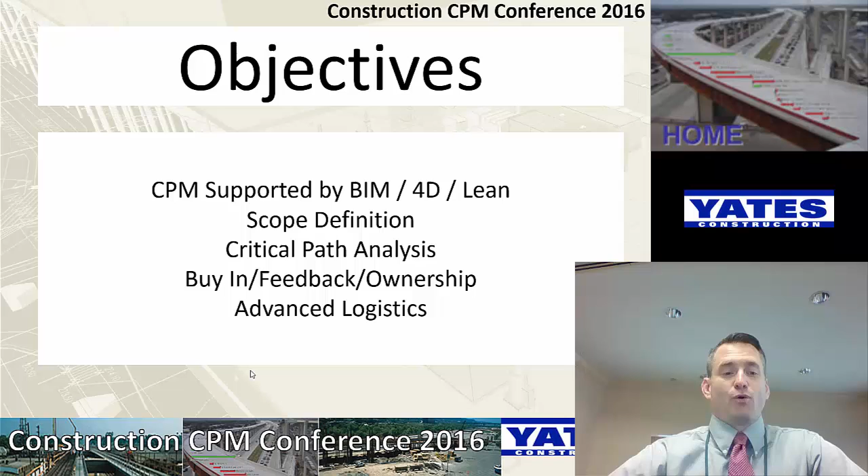I realize that for many of you in the room, this isn't your first rodeo. I'll ask the question again: how many of you have created a CPM schedule? The vast majority, that's what I expected at a conference. Now, how many of you created a 4D schedule? Over half, that's a lot better than we've gotten in the past. That's great, so we're coming along, we're doing a lot more of it.

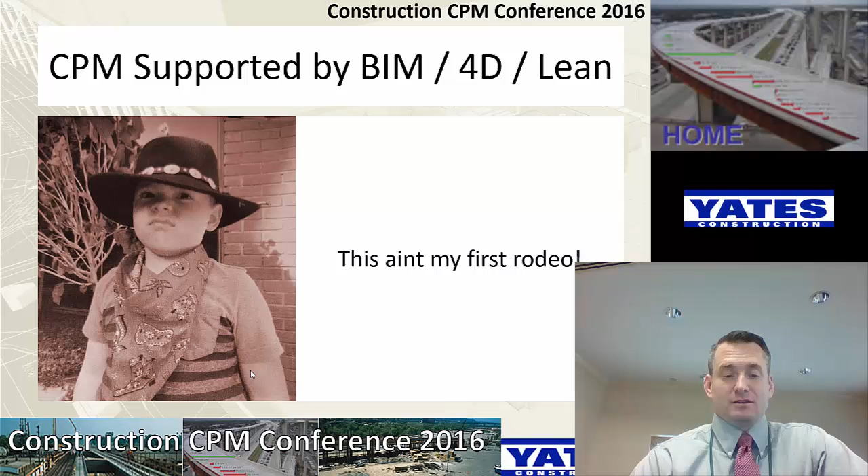So because this isn't your first rodeo, and it's not mine either, that doesn't mean we still can't learn something. In fact, we have to learn something.

Tom showed this yesterday, the same idea of the graph, that the design and construction industry is less productive than we were 50 years ago. He went through it yesterday, the top bar is the rest of industry, and the bottom bars are all different takes on construction, design and construction. Personally, I find that embarrassing. I love to build, right? This is my industry, this is my life, and we're less productive than we were 50 years ago. So I really want to change that, and I really want to be able to do it better. I think that BIM, Lean, continuous improvement is our only opportunity.

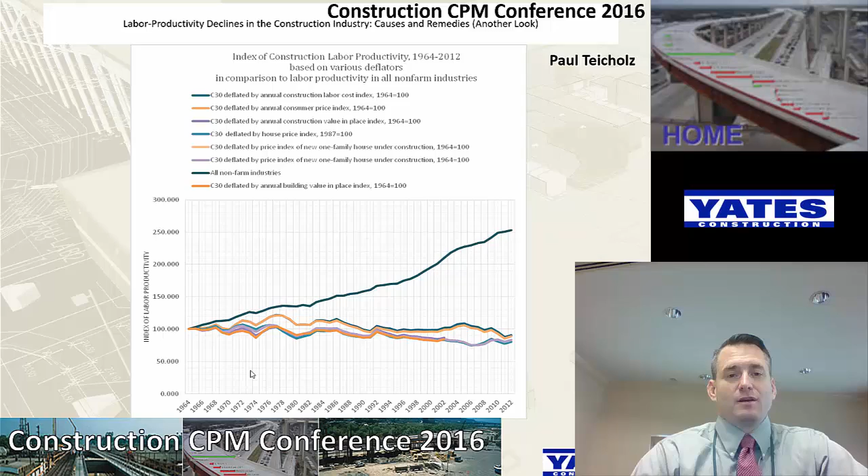So skeptics are welcome, right? I want your participation, I've already made you raise your hands a couple times, I've already had you participate. We already had some great participation from Charles up front here, as I got started a little earlier than I should have. But as we go through, I want to be able to talk about these things and have conversations about how we've used them and how we've done them.

So, any questions so far? All right.

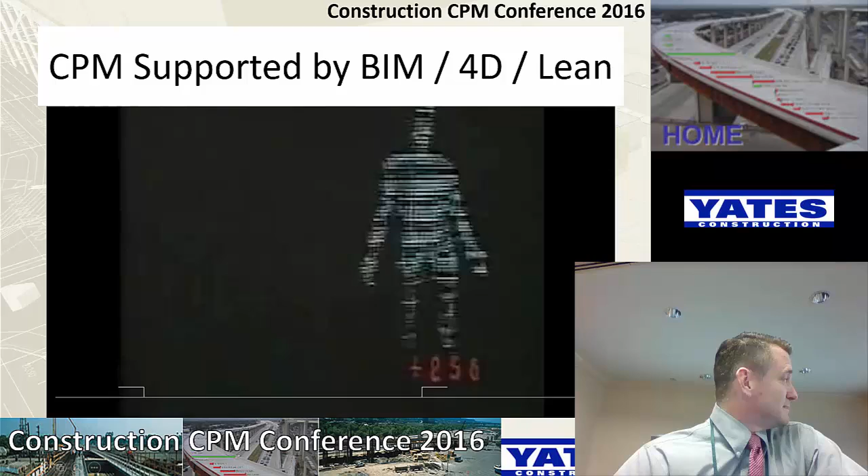Many of you will be familiar with the good old TV show, The Six Million Dollar Man. I used to love it. Steve Austin was a good guy, right? He was an astronaut, he was a hero already, wasn't he? And then the difference was he had an accident, but when he had the accident, he ended up being better than he was before. Better, stronger, faster.

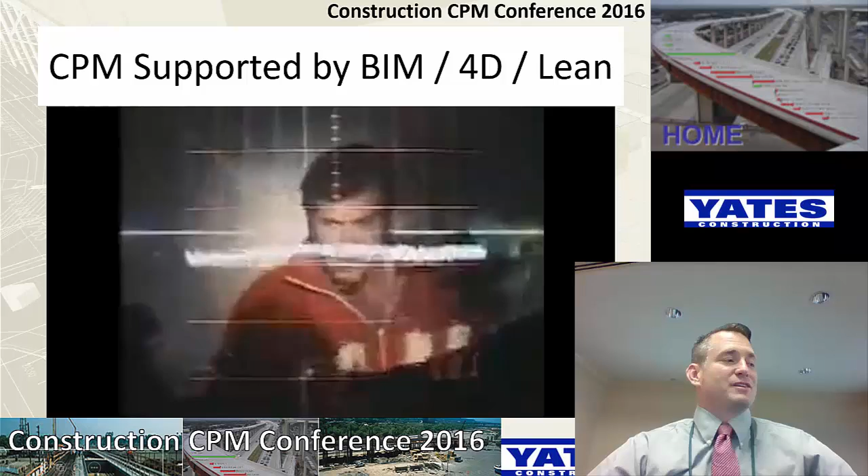That's exactly what I want to do with our CPM schedules. It's the same CPM schedule, it's the same processes that we've been going through for many, many years. We just need to make them better, faster, stronger. We just enhance them, we add technology to them to make them better.

So the first scenario I want to run through is when we're doing scope definition. This is one of the major principles of building a schedule, defining what scope we're building it for. So in this presentation, there's lots of light in here, if it was darker it'd be easier to see. But the idea is we have two sheets, plan sheets. Now this project was a 300,000 square foot, $60 million project. It had a big, good set of plans. It was just core and shell, which makes it a little bit easier.

But I want some thoughts from the room. A $60 million project, how much time would one of you spend flipping through drawings and sheets to understand the scope of this project so that you could build your schedule? Thought? A week and a half, okay. Others?

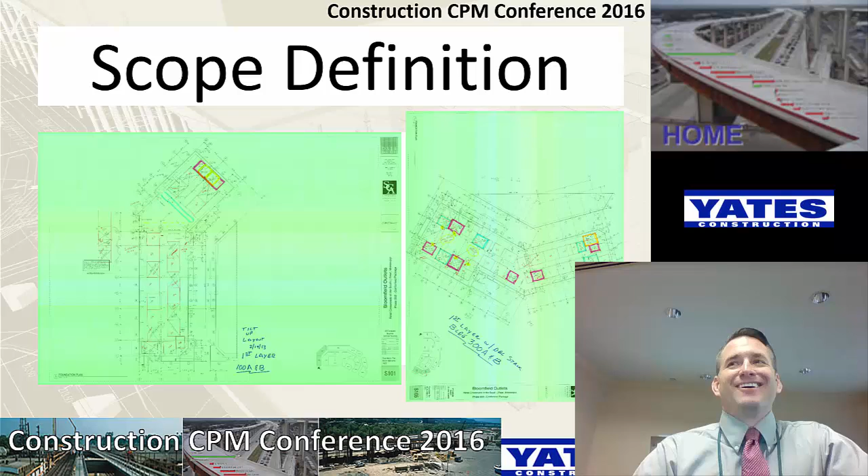Now, have other people in this room experienced the same thing, or have they experienced it differently? Anybody experienced the same thing? Hands? Okay, so we got a few. Anyone experienced it differently, that it was more work? None. Yes.

Yeah, so the point he made, so it's recorded for others, is that the more involvement people have up front in the BIM process, the more understanding they have of the scope. And so instead of walking up to somebody and dropping a set of plans on their desk and saying, get familiar with the project, you've been eating it in little chunks. And then you're very familiar with it when the time comes to actually produce the schedule. Mm-hmm.

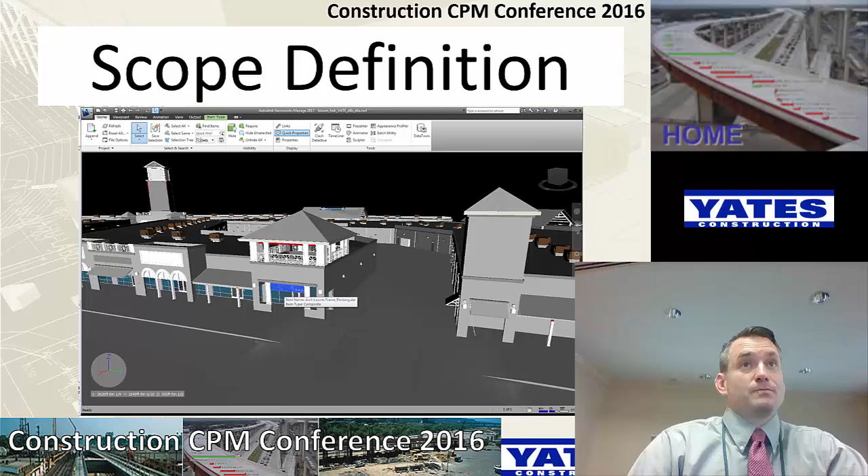And like Chris pointed out, if you're involved in the process, it goes better. That holds true for the architects and engineers as well. If they're actually building in the model to produce their documents, they produce better documents, and actually for a lower cost. So, all right, if I take this one step further, what I'm working with multiple schedulers to get us better at, we do it some of the time but not all the time, I want us actually building the schedule with the model.

Not building them separate from each other, but actually tying them together. And not actually creating the activities with the model as a background. I think it makes us faster at building the schedule, and we get a better schedule when we're done. Not as apt to have scope gaps and miss parts of scope. And it makes it that much easier to understand.

So it sounds like there's agreement from the group back and forth that in scope definition, we feel like it's better if we go with CPM and schedule to create a 4D model and produce it that way. So next, any thoughts or questions on scope definition? Yes.

Mm-hmm. Yes. It changes over time. And so if you only have a very low level model, if it's an LOD 100 or an LOD 200, then you would probably be using a level 1 or 2 schedule. And it turns out that the AACEI level of detail for schedules aligns very nicely with the BIM Forum LOD specification, level of development for models. Yes.

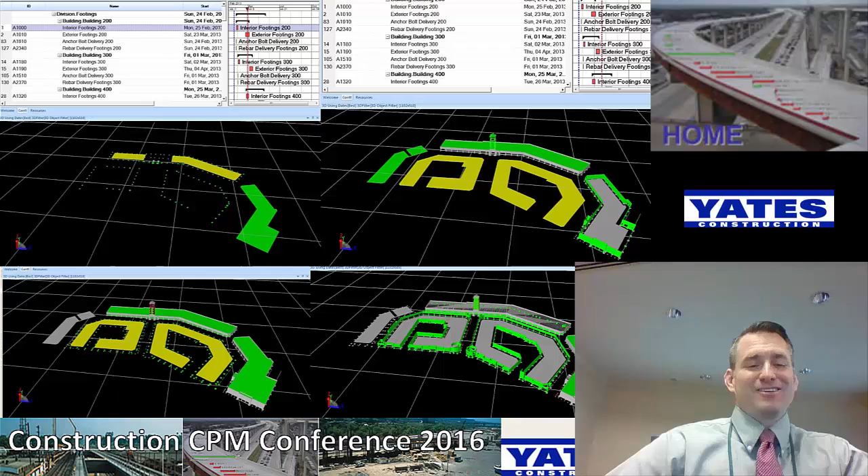Okay, critical path analysis is the next area. So previously, if we're analyzing critical path, we're going to publish a schedule somewhat like this, right? And of course, how many pages was this? Oh, it's probably 68, 70 pages. Here's the critical path itself. I think it was only down to 9 pages. This is what we would do, and we'd send the critical path out and tell the superintendent, the project manager, hey, go through this, look through the CPM, and tell me what you think of it.

Okay. Here I actually have the PDF version. There it is. The unfiltered one, the whole schedule, was 44 pages. And then the filtered one, just CPM, was clear down to 8 pages. But we're used to seeing these documents and produce them all the time. Once again, let's say we're in a claims situation, or we're not in claims but we have a project that's behind schedule and they want some help. And so they're calling in one of us as a schedule expert to figure out, okay, how do we cut some time out of this schedule?

If they set down a 44-page CPM schedule in front of you, 44 pages, 8.5 by 11, this is about a $50 million project, even if they give you the XER file, how much time are you going to spend understanding that schedule? Thoughts? Oh, if you haven't seen the prints, a whole lot. So if you sit down with the prints and the schedule, you're a couple days probably, right?

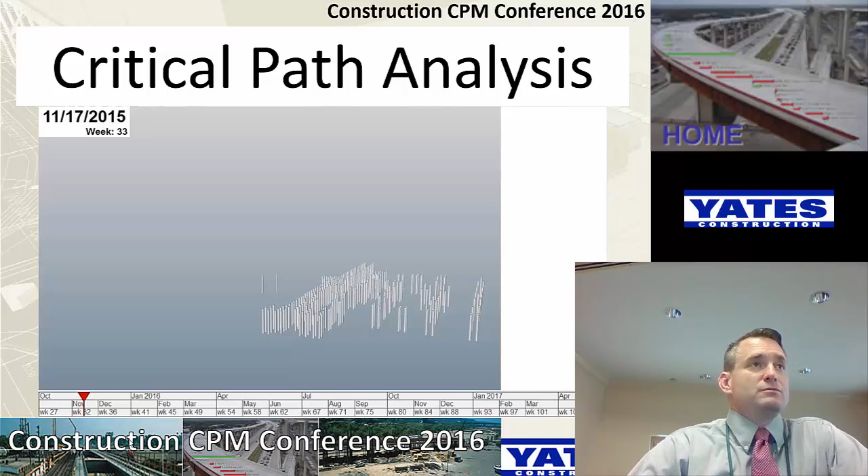I probably should have made this one a little bit faster. But I've gone in with a filter. Yeah, and it took me like a couple hours to figure this out the first time, like 5 or 6 hours. But now that it's figured out, it's pretty easy to take a standard CPM schedule, just apply the filters, and produce a quick video of it.

Now, the one that hits me on this project that I don't understand is why none of the piles were critical, right? Well, I would have really thought that the piles underneath those footings would have been critical. And so there's something there that's not quite clicking for me, and I've got to go figure out what that is. It could have been submittal approval. Yes, it could have been.

There's all sorts of things it could have been, but really, a lot of those things I would hope we could have alleviated. I would like my critical path to actually be physical items. I don't like it when my critical path is jumping around or going crazy.

Now, one thing that's interesting, if you notice that steel came up red, it was critical, and then it turned white. The detailing activity behind it is not a critical activity. And so it overwrites it and it turns it back to white with everything else. And so you don't see all the critical items when you're done, but you see the flow through the project.

So the general flow is, of course, starting with on the right side, working our way to the center, and then over to the left. All of the slab and foundation work on the left side had float time to it, and then our steel came up. Any other thoughts or questions? This is a perfect opportunity. Yes.

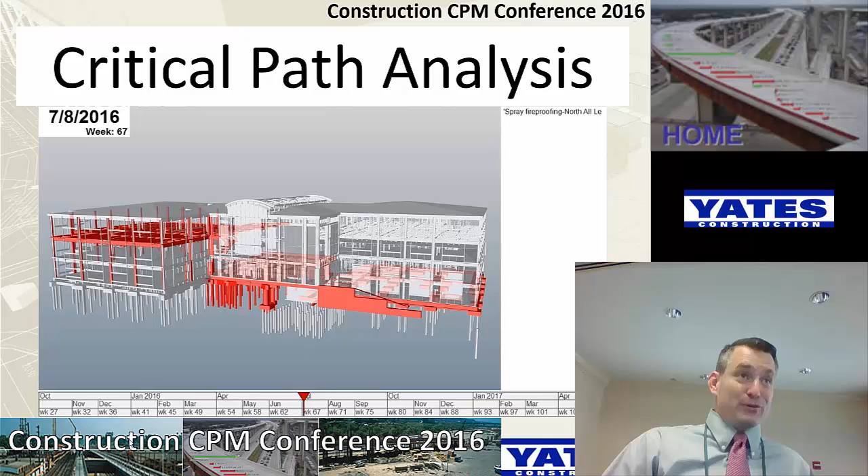I only did longest path. I could do near critical. I just did longest path because I know that superintendent, and if I show him anything red that's beyond critical path, he will expedite it too, and he'll put overtime in. So we'll just let him work with the critical path first, and then once he is really good at making the entire project early on everything critical.

Because everything that's out there, he'll put overtime in and he'll bring it in because he wants to build time on his schedule ahead of time so that he has it to use when something goes wrong. He's really good. Yes, sir.

Okay, so we produce every 6 weeks or every 4 weeks, every time we get a schedule update. Then, like I said, this particular project is working off of models of others because they haven't started, I think they're just in piles now. And so we are ahead of time. And so every month when they do the schedule update, we'll produce 6-week look-aheads.

And the idea is 6-week look-aheads with a regular view like you just saw, and then a 6-week look-ahead with a critical path. And then, of course, a complete update of the entire schedule. And we produce the original, the schedule file itself, the SP file. And everybody has free access to the open viewer.

And so everybody, even the tile guy that just has a little teeny contract on this project, can download the free viewer and be in the schedule and actually filter it for his activities. And then we produce videos for the people, a foreman in the field or somebody that just wants to look at it on their phone real quick. Did that answer your question? Okay.

My goodness, I just cannot go through slides fast enough this morning. Yes, that is how we tie all this together. And so I'll have pictures of that. If you have a particular question now, I'll hit it, but otherwise I'll roll till I see the slides.

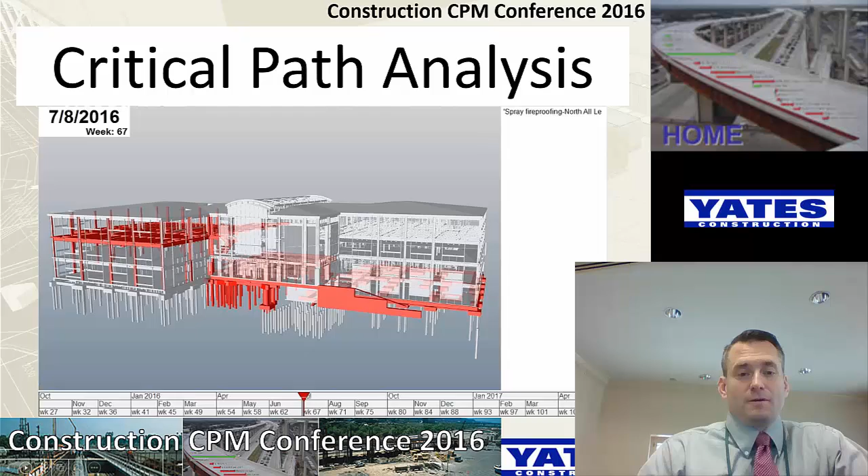All right. So buy-in, feedback, ownership. You guys have led me right into this, right? We're talking about the superintendents using it. How does it work? Basically what we have here is a schedule update, right? The blank fields, actual start, actual finish, remaining duration that we do for a monthly update. We still publish this, even with the 4D. We still need that feedback and information.

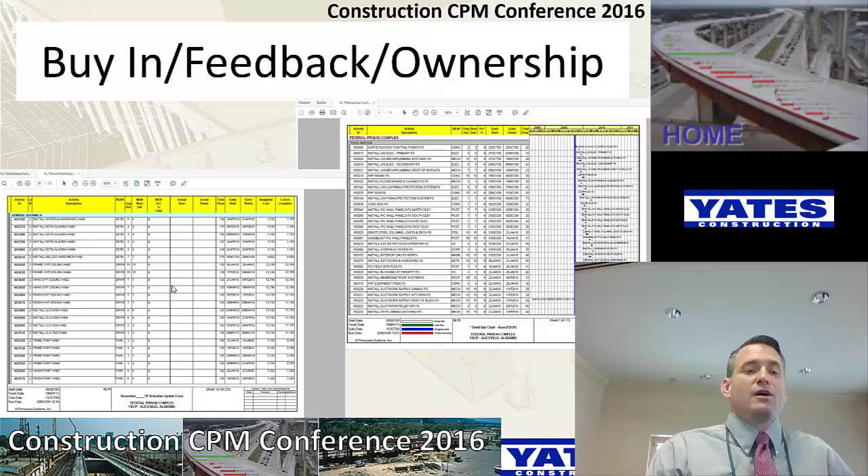But what I find is people are actually starting to carry it more. They're actually using it because they feel like the schedule is relevant. I'm not losing those superintendent foremen that used to think that schedule is just a piece of paper. They're actually getting into it. And we talked earlier about being involved in the process. This particular one is a project. This was a proposal. This is a level 2 schedule like you guys were talking about.

You're going to see lots of long bars, lots of large areas on this earthwork project. But the idea was when we came back and we did this, they could actually see the flow of it taking place as the different scopes of work kind of go around and fill in and redo this entire retention area. And what we do is we have a process. It's a very lean process.

We meet daily. We're preparing for the proposal. We're going through it. We meet daily. We walk through the schedule every day. And they look at it and say, no, change this, no, change that. Sometimes that meeting has been 5 minutes. We all get on and there's nothing really to look at today, and then we all get off. And sometimes that meeting is 2 hours with an additional hour later that afternoon with one of the 4D champions that sets his own meeting that afternoon to call people in to say, hey, we need more review on this.

And we build it as we go. And then people are reviewing it and it comes along. That is lean, right? That is small steps, not trying to bundle the work. We have that tendency, all people do that. We want to do all this at once and then turn it out there, and then we go back and change all of it again. But if we make it in small steps, here's this little bit and then change it, here's this little bit and change it, wow, we get the buy-in and everybody does a lot better.

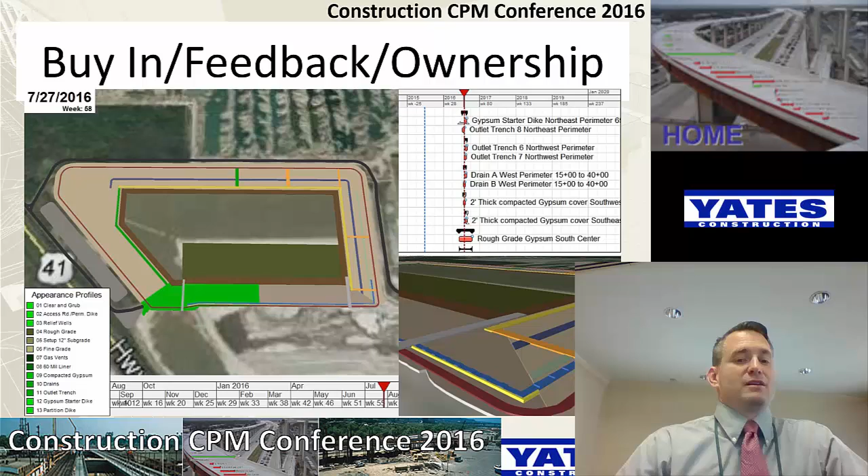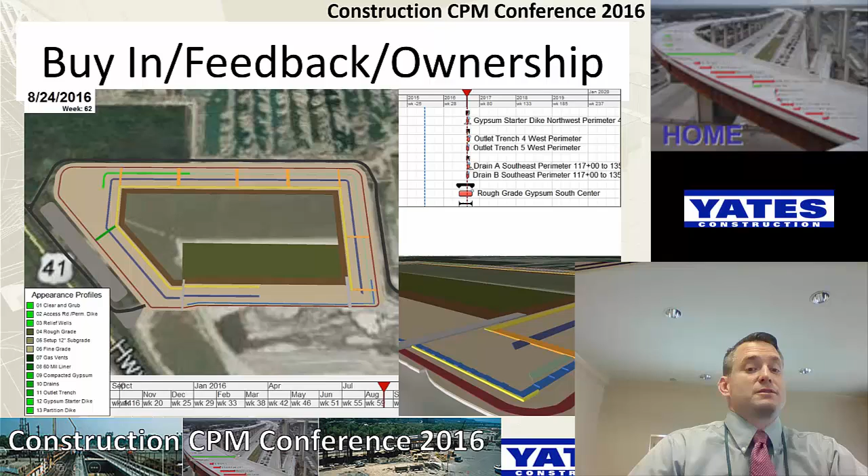Thoughts or questions on that aspect of it? This was pre-award. This is pre-project. Okay? All right, here we go. This is award or project, feedback, buy-in. These are my Post-its on the wall, right? This was building the original feedback on the schedule, right? Doing our last planner system. How many of you have participated in a last planner pull session? There, a good number of people.

Okay, so the big advantage I see in the last planner pull scenario is that it gets the people that are doing the work, foreman level, superintendent level, involved in the schedule. They actually are looking at it and they are writing their own notes. I keep seeing software out there to take all this onto the tablet and all this stuff. There's a huge advantage to them writing their own notes.

Now, when the software is available and each guy can use his own tablet and type in his own thing and arrange it, then I might go there. But I need each individual. I don't want somebody else doing this for them. I want their buy-in and their feedback. And then, of course, we roll this back into the schedule. And so here's our 6-week look ahead. Those are the Post-it notes from that project. Here's a recent 6-week look ahead from that project.

Now, you'll notice those other 4D models I showed, you guys got a quick understanding really of the flow of the work and things like that because they were all a higher level. They were a level 3 schedule, sort of level 3 model. This is level 400. This is fabrication models coming back in. That ductwork is what the ductwork guy is going to send to his bending machine and CNC machine to actually cut with. Right? That's what he's going to use. And so this is really detailed.

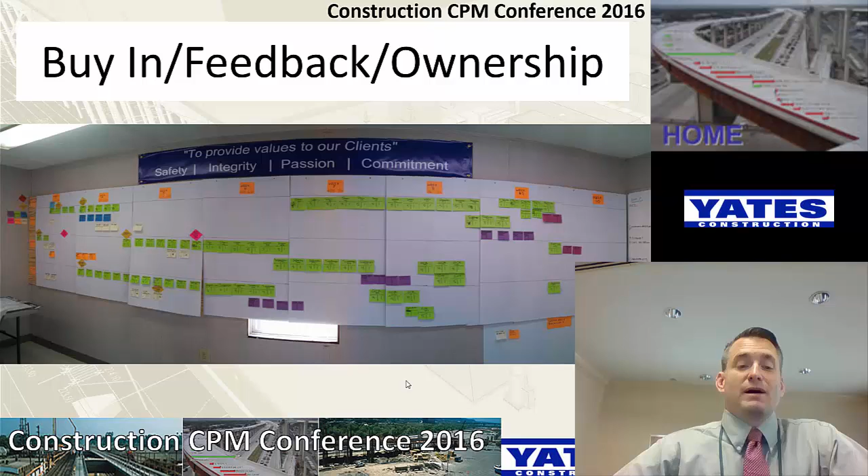And he drove to his other office and he sat down with the people and he had it, instead of it going through the Army Corps of Engineers, right? Usually with the Army Corps of Engineers, that's a very rigid process and you don't deviate from it. He went and hand walked it through to get his project an extra 3 weeks up front. So yes, we start to see those changes. And we didn't have to ask for it. He just saw it happening. And when we combine all of this, they start to build off each other.

All right. Yes, sir.

We didn't ask. This was early on, we hadn't even really developed a relationship. It was just a matter of we looked like we were putting forth every effort to do the best that we could, and he saw a way to be a part of our team and help. He stepped up and said, I want to help, basically. And now that moment established a relationship that is working very well, and we really have a team dynamic.

Now it could have been completely different. If that had been a different owner in the room and he was kind of like, yeah, you guys are messed up, the whole project would have been going a different direction. But we don't like those projects anyways.

It was the QA folk, I can't think of his name, but he was there on site as the quality assurance, part of the project, and then he went back to the office and said, hey, this helps the project out. It doesn't cost us anything, it doesn't hurt us at all. We just turn this around in 3 days instead of 3 weeks. So it worked out really well.

Okay, so earlier you talked about building this down, and the room's kind of spread out, I don't know how much you guys can read this. The idea is, if we're tying lean into it, our push schedule is our level 3. Once you get buyout, you get buy into it, right? You contract, everybody has to meet the level 3 schedule. That exists in P6, or for us, Synchro.

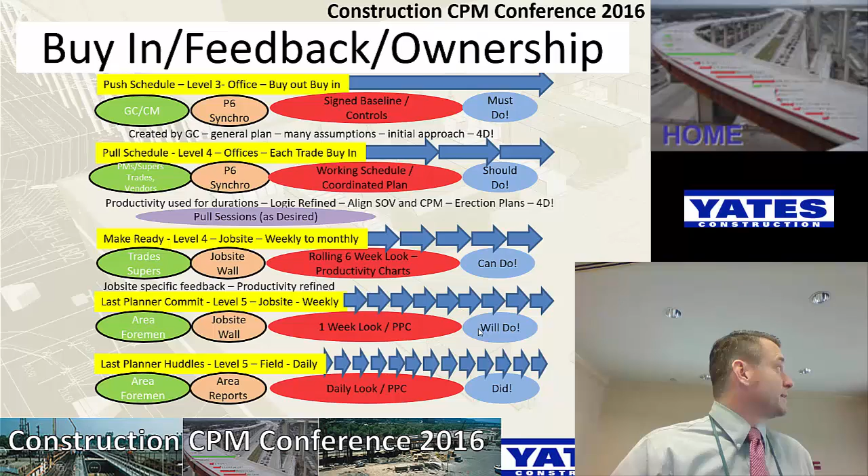So what we end up with is something like this. Not very often in the past would I get the owner involved in the project, but that owner was out there with his tablet - of course, someone else was handing him the tablet, he didn't want to drive it himself - but he wanted to see the model compared to current construction and what it was really going to look like.

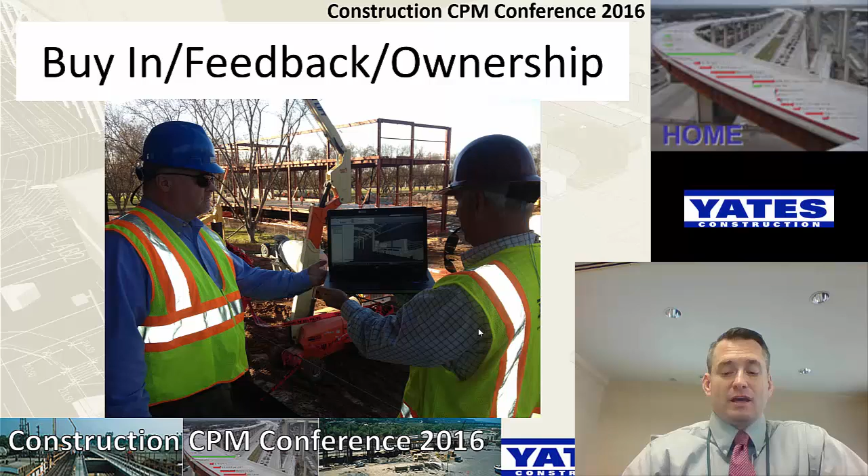And we just see people getting involved, and that's what we're really after. This comes back to ownership - not just ownership because this guy was writing the checks to pay the bills, but ownership in that he wanted to be a part of this process. That worked out very nicely for him and for us.

All right, I came back to this one for feedback and ownership. Once again, this was a little bit hard to understand. This was a very detailed model that took a lot to put together. It's only a 6-week look ahead. But what we see is ownership coming from the foreman in the field, and they will be quick to point out that it's all wrong - you got to change all of it.

The hardest thing I've learned to say is, thank you for telling me how screwed up I am - I'm glad you told me, now I'm going to go try to fix it. And that works really well. If I stop saying thank you, I stop getting feedback. That's why early on I showed you the slide of the skeptic. I really believe that - I want people to tell me it's messed up.

In fact, I just got to show the critical path of an upcoming project to a room full of schedule experts. It'd be great if people would walk up afterwards and tell me everything they thought was wrong with that, right? It's being vetted - it's not done yet, it's in the process. I love the feedback.

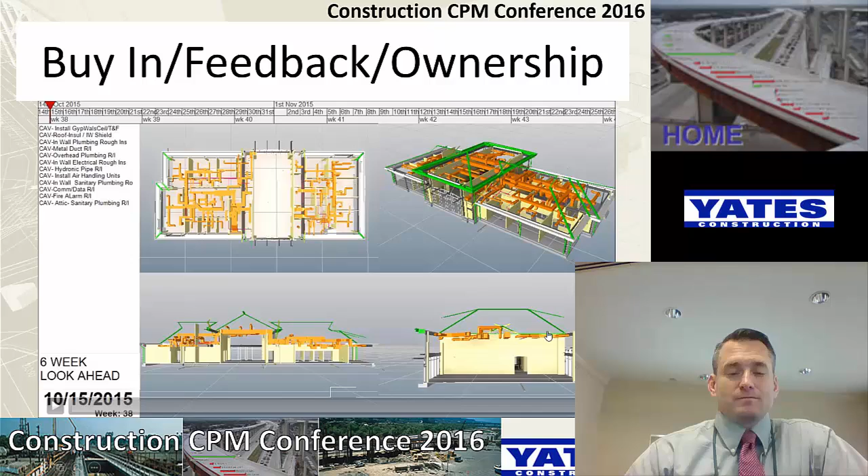Now, one of the thoughts you guys had earlier - where do the models come from, how do we get them created? This should be done a lean way. I really want design and engineering models - I want those level 3 models from them. If I have to go back and recreate them, it's wasted. I'll still do it because I'm better off having my 4D in the long run, but I have to waste money getting those created, and time. That makes it hard sometimes to get it done in time.

When I'm in that scenario, I have to go back and create my own models. Then I am pressed for making it all happen, and I have to try to slow guys down a little bit. But we're getting better at that - I'm finding people that are faster.

What? Sometimes. It depends upon the market and what we're doing.

But yes, sometimes we self-perform on concrete. Really, I usually don't need a lot of models for self-performing concrete - I can let that get ahead of me without too much of a problem. But I really want to try to get some of the underground done first.

If we have the model, we pull the quantities and do all that. If not, we just do it the traditional way—I'm trying to do the bionic man scenario. If I don't have the bionic man, I use good old Steve Austin and run with what we've got. So if I have those models, it's really easy to create a CPM level 3 schedule. I can take those together to create my 4D CPM at a level 3.

Then I come back for my trade vendor feedback and the shop models. That's how I know what models I'm getting back from my contractors. If the specs require a coordination drawing or a shop drawing, I expect them to model it. If it doesn't require anything like that, it doesn't need to be modeled. It's a very simple one.

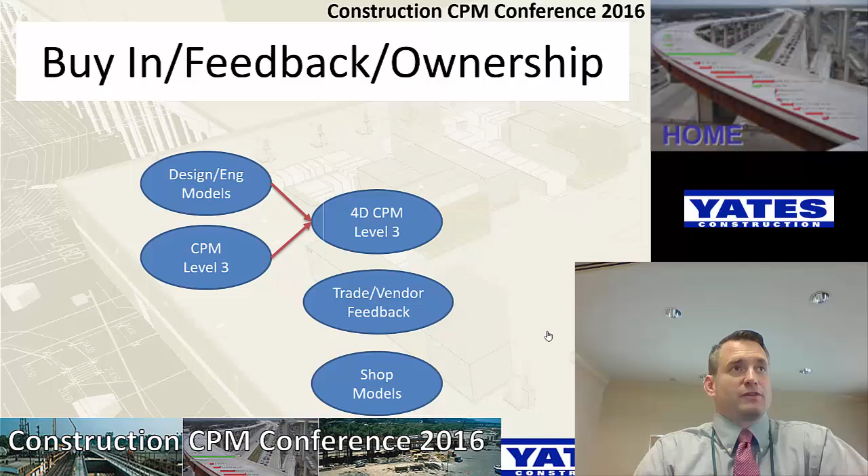Then I can combine those, and that gives me my level 4 CPM, in 4D. Of course, this is a hard bid scenario—there's my line. If I have the privilege of working on this prior to that, or having things earlier, then it's some sort of negotiated scenario. I can have my CPM level 2 up front.

And I can use that to drive the design process, because that design process then has to meet that early schedule. And then that goes forward into my level 3 model. So that's the scenario that I'm after.

And I can work in either of those scenarios. I like the green scenario a lot better—I think most of us like the green scenario better, right? The whole idea of hard bid work is the value myth. There's no real value there. It does not save the owner any money overall.

Thoughts, questions? Did I miss anything? Yes.

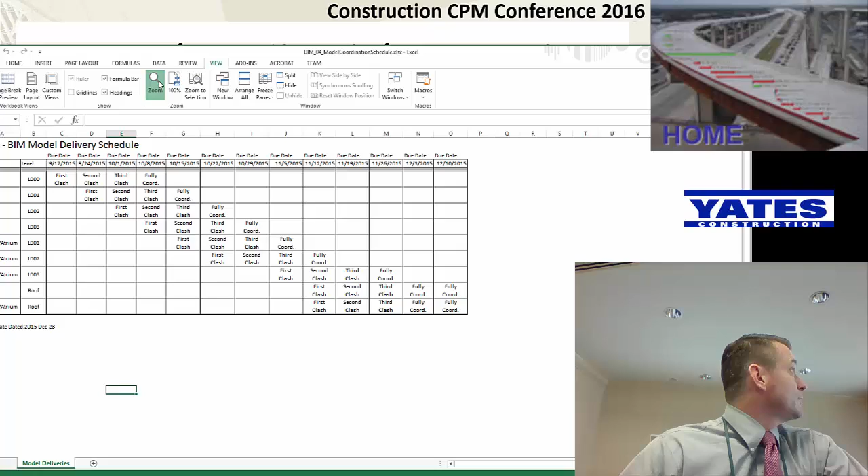I've had them get away from me on the coordination process—they just kept coordinating and wouldn't turn an area loose. So we recently had to take and produce, and it's now part of our regular plan, something that looks like this. Let me zoom that up for you. View, zoom—let's go maybe 200.

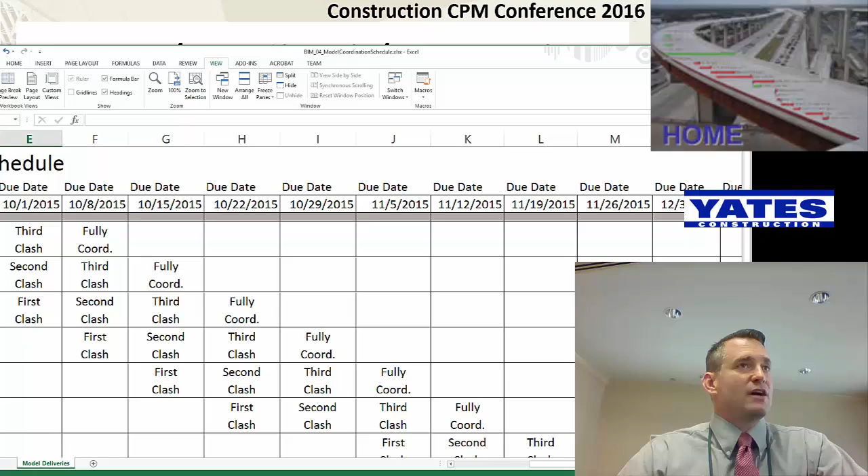Okay, so this is the model delivery schedule. What we have to do is come back and break out the areas: south level 0, which is basically your underground area, north level 1, and this is how we should be delivering our models. If we wait to the very end to say, oh look, here's a coordinated model on December 3rd, we're too late—we've screwed everything up, because the other early work has to start sooner. But when I lay it out like this, and I get my underground done for that south level area, and have it produced and coordinated and ready to go within 5 weeks, I have beat the submittal process.

I am now faster than a traditional process, because they are starting to do work. And then they come around later and start the additional steps and additional areas, and usually we can stay ahead.

Generally this works. I got caught on this once because my interior walls were structural, and I was used to interior walls being finishes that came in later. But when interior walls are structural studs and they support the slab above them, your MEP coordination has to happen much faster than this. So you have to watch out for that. You had a thought, sir?

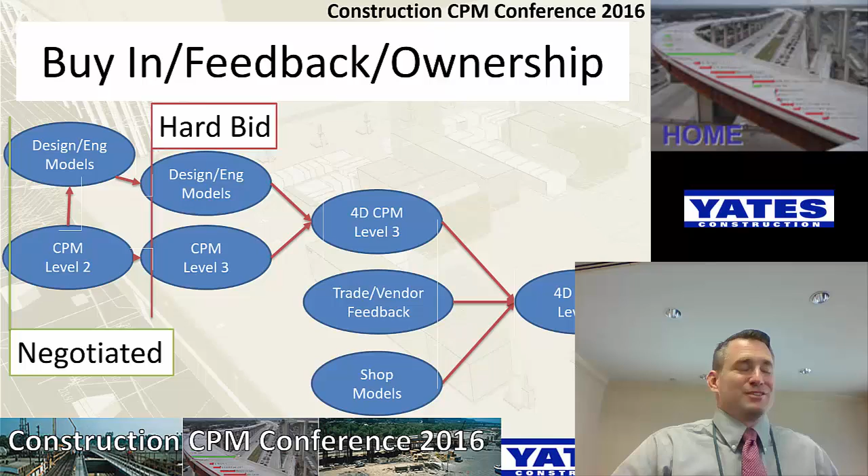Great conversations. We're doing good. Any other thoughts, comments? Have I gone overtime? Am I supposed to be done? Or I have 15 more minutes? 15 more? Good. Okay. I just did so poorly at the schedule when you started out. I got to keep track of it now.

As you pointed out earlier, the critical path might be through a delivery or an outside procurement. In this particular case, it was. The owner was providing the metal doors and hardware. Very common for a prison project. They don't like to go buy those off the shelf. And so that was our critical path. So we're used to doing that the old way.

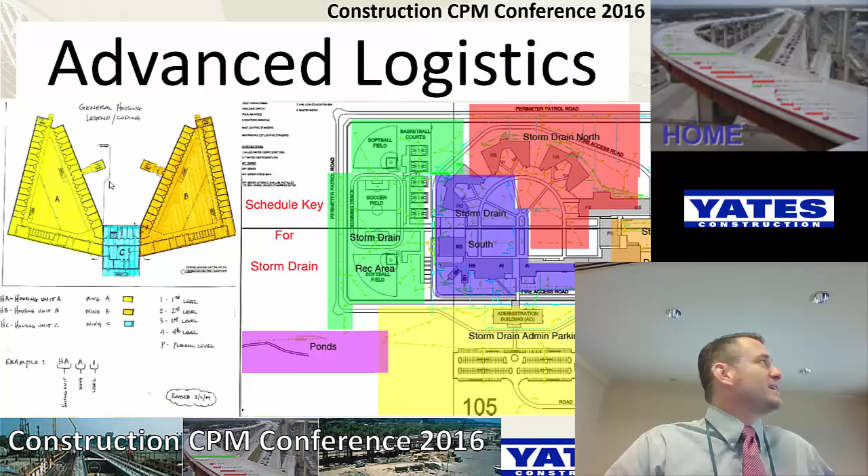We also would go into each of the individual buildings and then do a key map. These are the areas, or take a trade like the storm drain and break it up in individual areas, and you start producing all of these. I think I had 15 or 20 of these keys that you could try to publish with the schedule for people to understand how the schedule worked.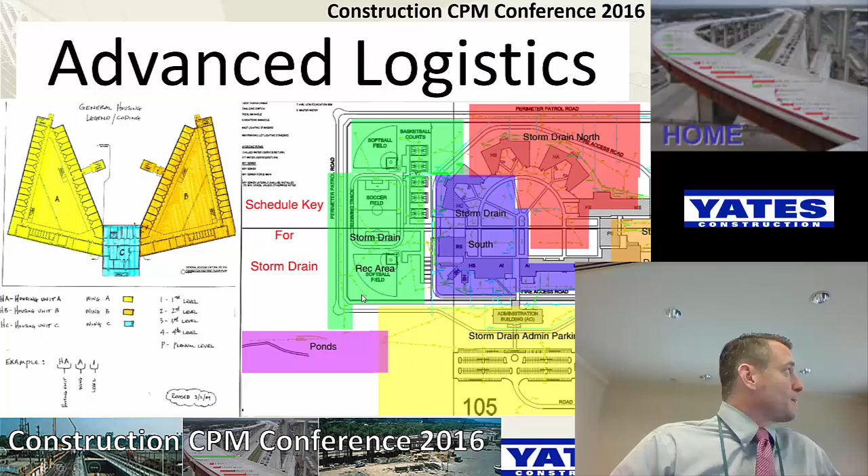Now, for advanced logistics, we use our 4D. So this was a project that we were putting together advanced logistics on, and we got detailed on this one. We had to, because the logistics were really tough. And so even just looking at it, you guys could probably count how many crews we had removing earth on this project.

Right? If you watch it a couple times, it's going to be pretty easy to count how many concrete crews we have making pours. You look at how many different areas are green at one time. So this is an isometric, this is a plan view, this is isometric from another angle. So if you look down here at the plan view, you can start to count, and you get a pretty good idea of how many concrete crews this took to pour those slabs and come up with it.

We're not digging through plans. We're not digging through everything else, right? Am I having to go look at resource loading to figure out how many tower cranes I have on the project? No, I don't have to do a resource load on that. I can just look at it and see how many tower cranes I have. You'll see the same thing on buck hoists. You'll see this logistics area.

That's the thing that used to always get me on my logistics plans. We would produce a logistics plan, and it was usually pretty good for about the first 4 months of a project. And then the logistics plan had to move, and it never seems like anybody ever did what's it going to look like then, and then, and then. And so you'll see as soon as we get a significant area of the basement or under slab parking of this project done, this whole lay down trailer area just goes away.

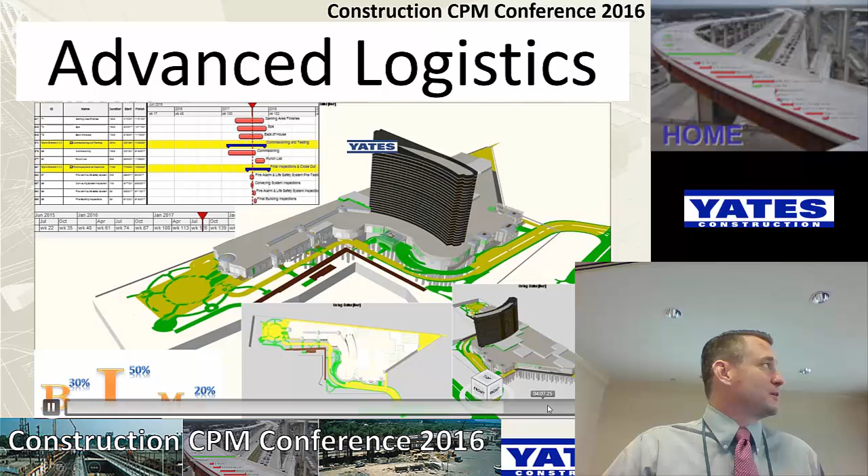Logistics change. We go through the project. It moves on. And then when we're all said and done, we can do all the landscaping, final paving, demo our temporary roads. You'll see that temporary road disappear here in a little bit. And then we're all good to go.

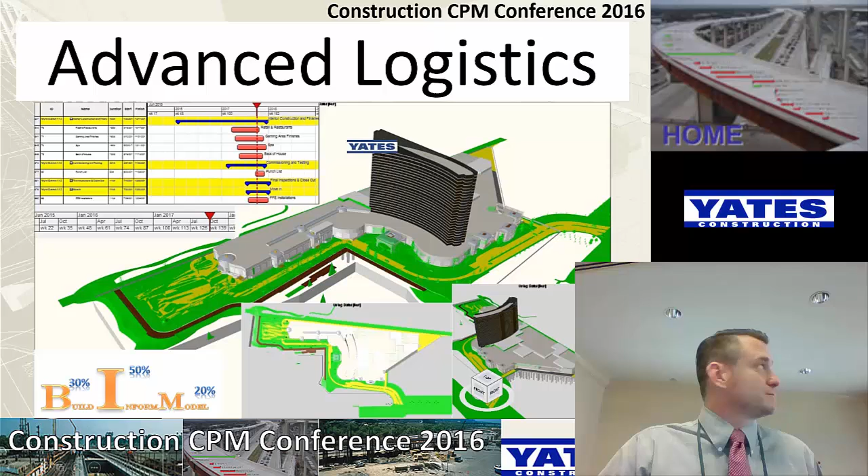So the whole idea behind it, and this is called the MacLeamy curve, and it's a BIM-based thing that you'll see at BIM Forum and stuff like that. Early on in the project, we have a large ability to make a change. That includes the schedule. We have lots of options and lots of flexibility. We can change resources, we can make adjustments. The further we go through the process, the less opportunity we have to make adjustments and change. That's why it costs so much to recover a project at the end. You just don't have options. You have to throw money at it.

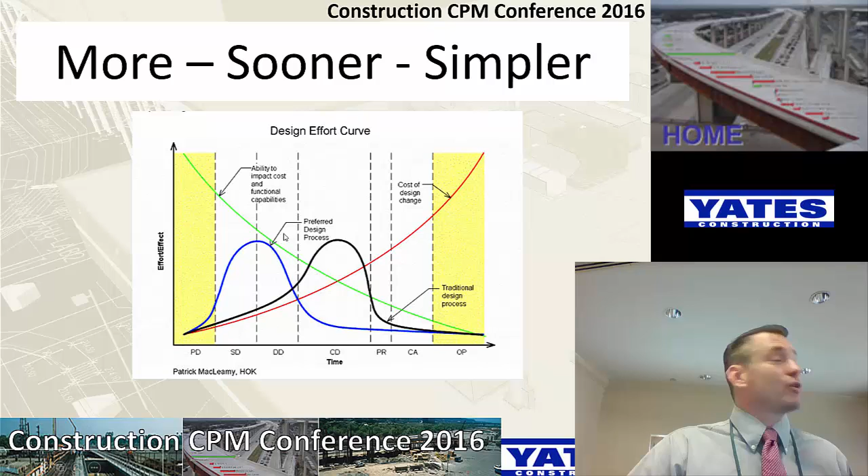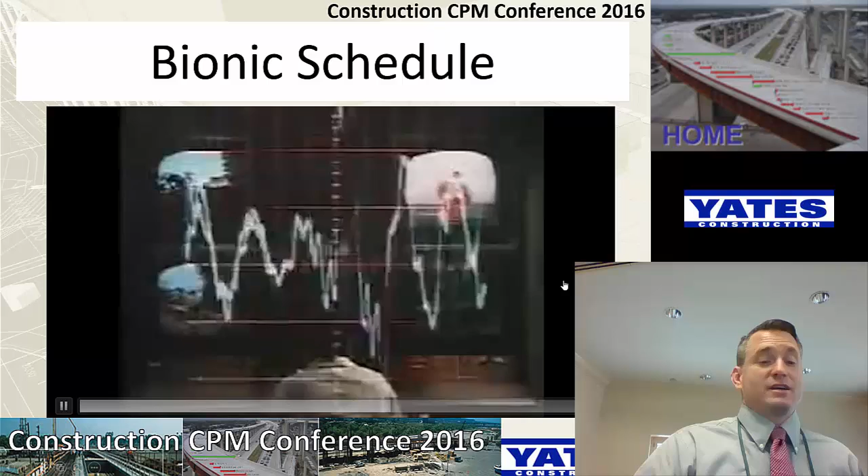So once again, better than he was before. Better, stronger, faster. Better, faster, stronger.

So now some of you might have seen before, you have the option of spending a bunch of money and making it look really pretty. Let's look at a pretty one.

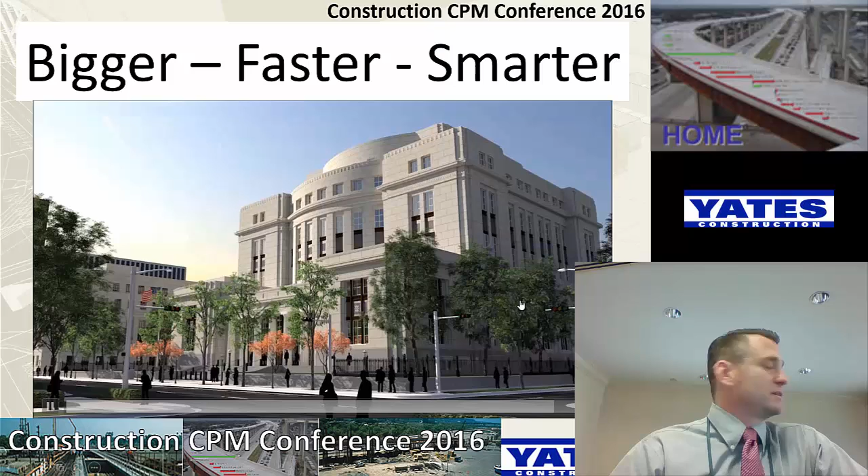Is something more like this. So a recent project, this would be the proposal schedule, and we won the project, and now we're moving forward with it. Okay? So in the proposal stage, high-level schedule. Yes, it's equipment loaded. That is a pile rig, representing that there's a pile rig moving across there. 2 pile rigs, 2 pile crews.

This one is easily changeable. This one updates as the project goes along. Right now, we're just looking for updated models. As the design continues, about every month, every 2 months, as they design build this, we'll get updated models. That steel model is the steel order. So the concrete's moving and the pits are still moving based on the design.

That steel order is in. That is a level 400 model for steel. And it is already in our schedule and it is set to go. And so we just keep moving forward and we pick up the pieces that we can. I don't have to wait for it all at once. I just develop it as it comes, as it goes.

Right now I have no under slab plumbing or anything in this project. As soon as I get that model, either design model or fabrication level model, I'll put it in. I should get the design one first, I'll put it in. We'll see how it goes, then we'll get the fabrication one later, we'll put it in and see how it

goes. And just keep building it out step by step at a time until we end up with the super schedule, where everything's done on time. Hopefully we set a new standard for this client. We want to build this facility faster and better than they've ever had a facility built in the past. You had a thought? Yes.

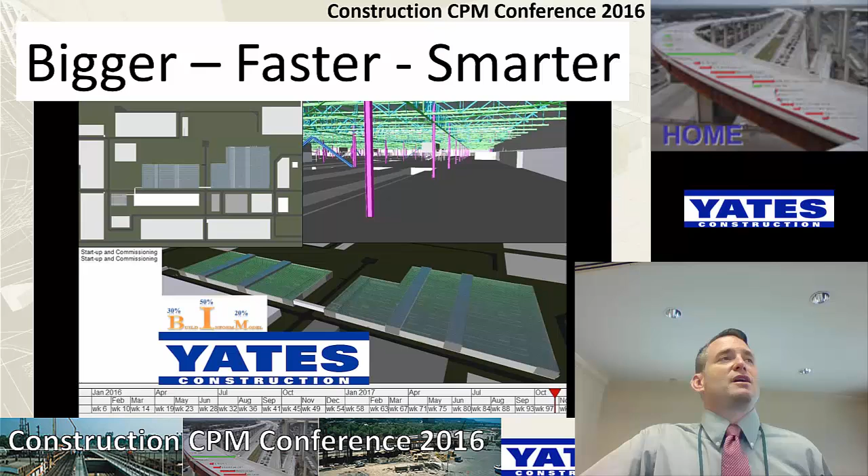My trades have a hard time the first couple times they do it thinking, we're just getting the shop drawing approved for one area? Yes. You've got to get all your documents in, all of your product data, your warranty, you've got to get all that information in right up front and fast. So that way it's all approved to go with it, but you don't have to wait for every single piece of the shop drawings to be done.

Any other thoughts, questions? It's hard to wait to the end for questions. We've been asking them all the way, haven't we?